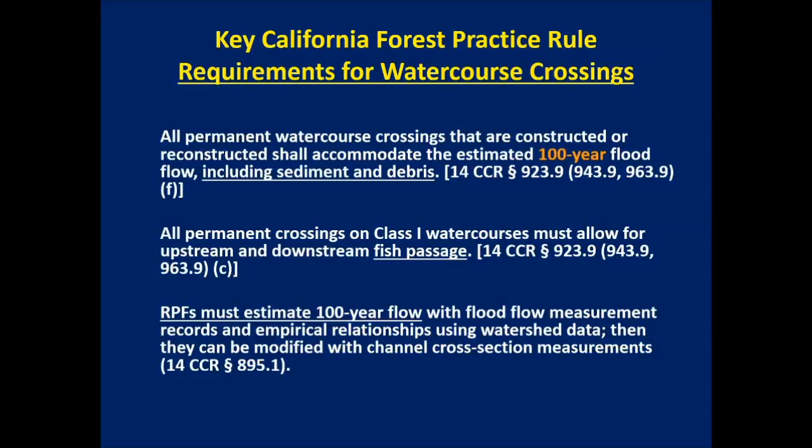Pleasure to be here and give a talk myself this afternoon. I want to report on some work that I did with Leslie Reid, my co-author, retired research geologist with the U.S. Forest Service PSW, who did a lot of work on this paper.

So basically, I would call this an applied hydrology talk. We're using Caspar Creek flow records to test peak flow prediction methods applicable to watercourse crossing design.

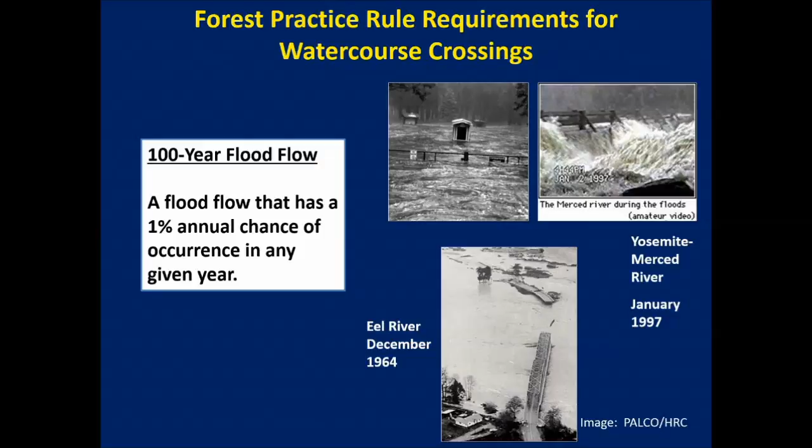Just a quick outline for what I'm going to talk about: introduction and background information, the Caspar Creek site (Liz has already discussed that, so I don't have to spend a lot of time on it), the methods we used including methods to predict peak flows, our results comparing the methods and sub-watersheds in Caspar Creek, implications for crossing design, and some summary points.

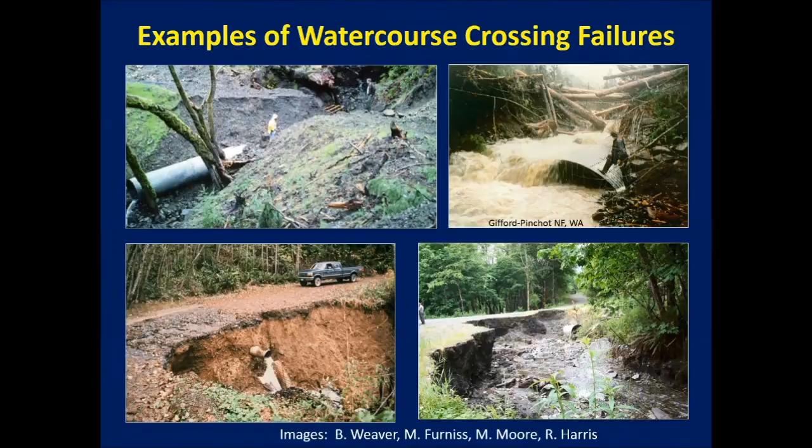With the California Forest Practice Rules, since July of 2000, foresters have had to design permanent crossings on non-federal timberlands for the 100-year flood flow, as well as passage of sediment and debris. When I started in 1981, it was a 25-year event, then in '83 a 50-year event, and in 2000 a 100-year event. So a 100-year event is quite a strict standard.

If it's a Class 1 fish-bearing stream, obviously they have to be designed for fish passage. And when registered professional foresters estimate 100-year flood flows, they have to use flood flow measurement records that might be available, and empirical relationships using watershed data, then modify that with direct channel cross-sectional measurements.

Just so we're on the same page, a 100-year flood flow is a flood flow that has a 1% annual chance of occurrence in any given year.

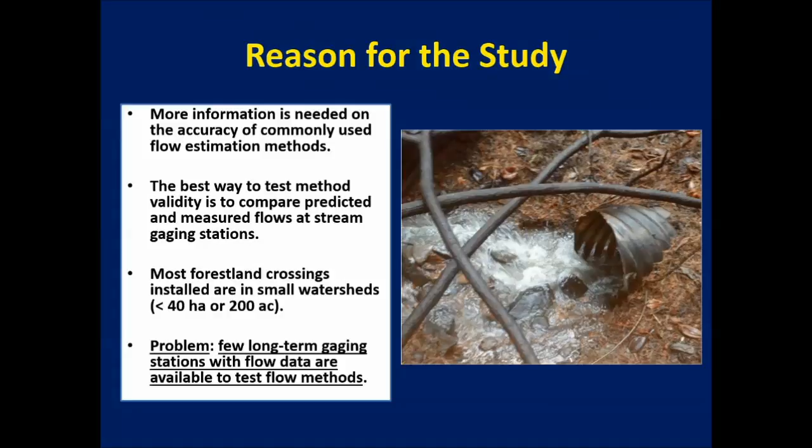We've heard today about some flows in the North Coast Redwood region over the last several years. We really haven't had a 100-year flood flow for a very long time. We did have one in the Central Sierra in January '97, the New Year's Day storm. But we haven't had an 80 to 100-year event in the North Coast for most of the region since December '64, the legendary '64 flood, and here we show the Eel River.

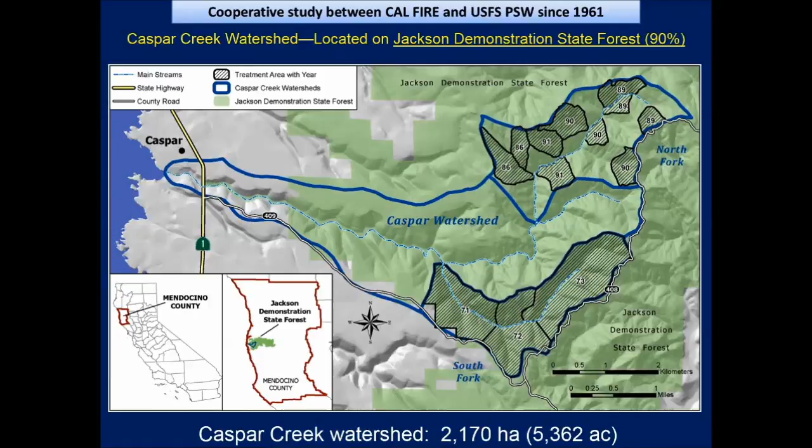We do, unfortunately, have a lot of examples of failed watercourse crossings from lesser storms. Three of these are from the coast region, the Redwood region. Also included on the top right, a photo that Mike Furniss and Sam Flanagan have shown a lot that I always liked - it's from Gifford-Pinchot National Forest in Washington.

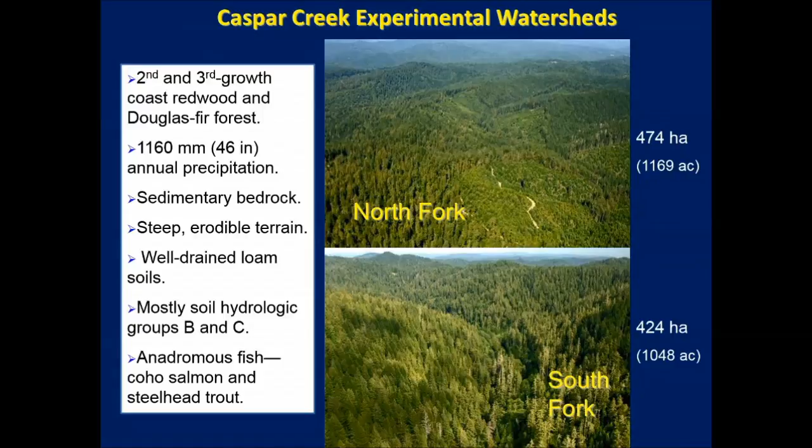So the reasons for this study: we think more information is needed on the accuracy of commonly used methods that foresters use for designing watercourse crossings. The best way to test the validity of these approaches is to compare them to measured stream flow data.

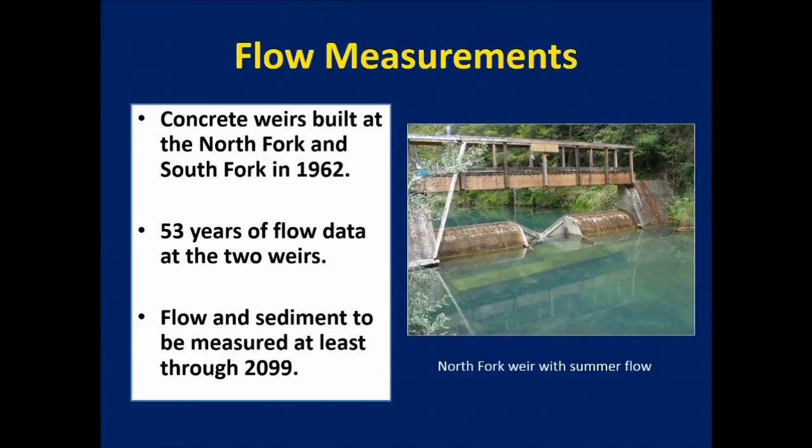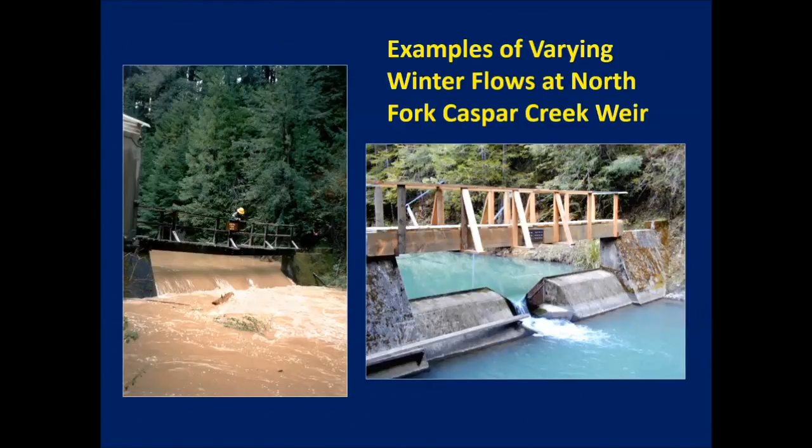Most forest crossings, and we've been monitoring forest crossings for more than 20 years, a heck of a lot of them are in small headwater streams - many in Class 2, Class 3 streams that are intermittent or ephemeral and often have drainage areas less than 200 acres. So the problem is we don't have that many long-term gauging station records to test these methods.

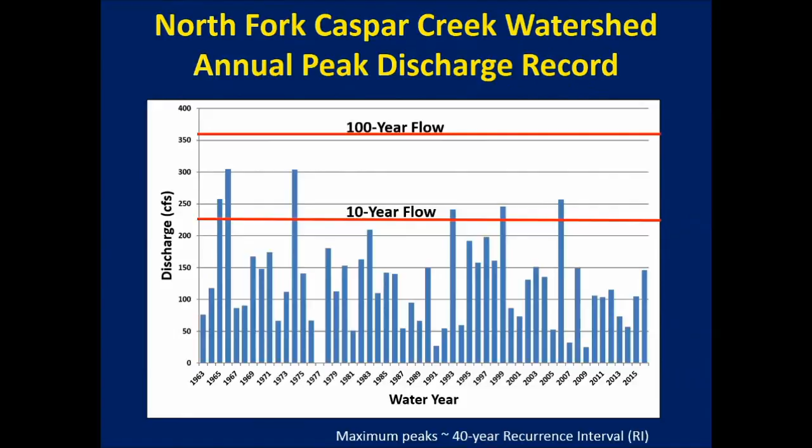We don't have a lot of gauging station data in these very small watersheds, but luckily we do have a long-term data set from Caspar Creek. Liz has told you about Caspar Creek, and I know a lot of you know a lot about it already. It is the site of a long-term watershed study between CAL FIRE and the PSW since 1961.

The experimental watersheds are located on Jackson Demonstration State Forest, site of 2 experiments, the South Fork in the '70s and the North Fork in the late '80s, early '90s, and a 3rd experiment currently planned.

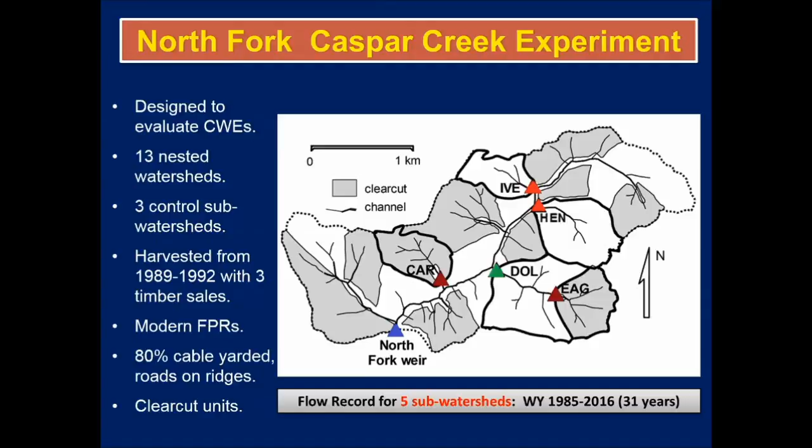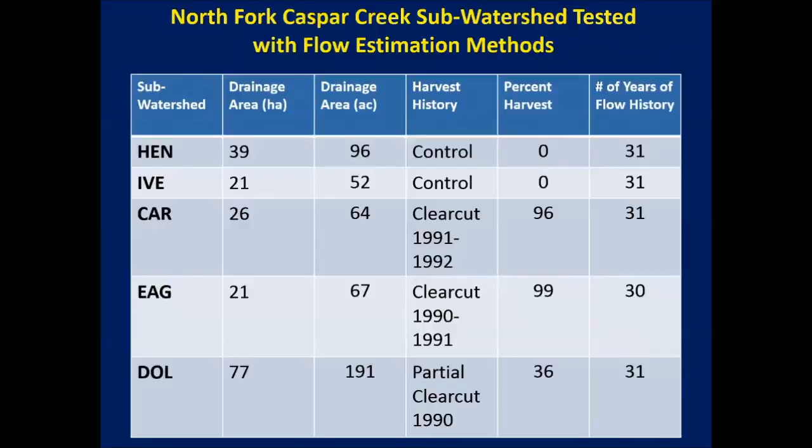It is second growth and third growth coast redwood and Douglas fir forest, as we talked about, 46 inches of annual precip, steep erodible terrain subject to landslides, as Liz told you about a few minutes ago. Well-drained loam soils, mostly in soil hydrologic groups B and C, and anadromous fish streams.

The weirs at the North and South Forks were built in '62, so we have a long 53-year record of flows, peak flows in both the North Fork and the South Fork, and we expect to continue to monitor with a long-term agreement with the PSW through at least 2099.

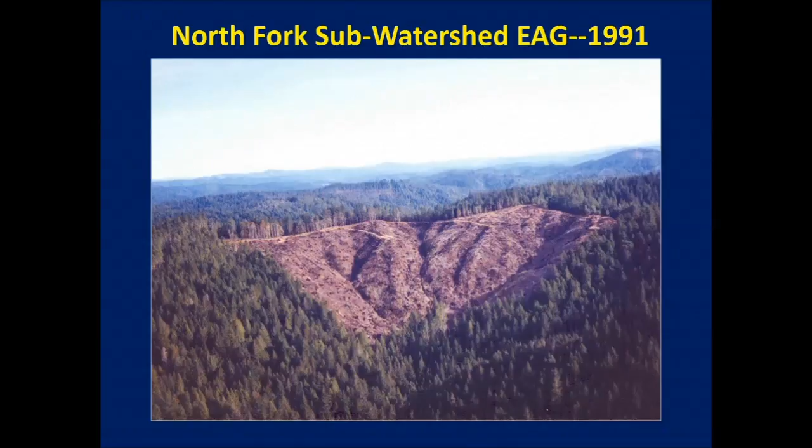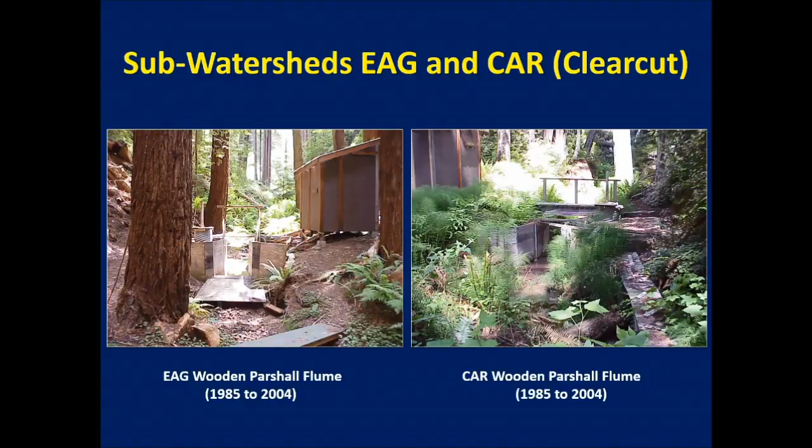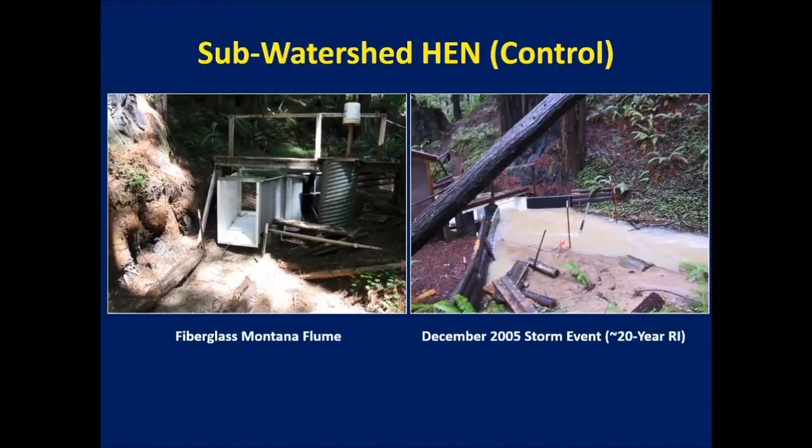For our study, we focused on the North Fork, where we installed headwater monitoring stations in the summer of 1984. I enjoyed helping build those stations that summer, and we put headwater stations in 8 tributaries, and 5 of those have continued to be monitored for the 31-year record.

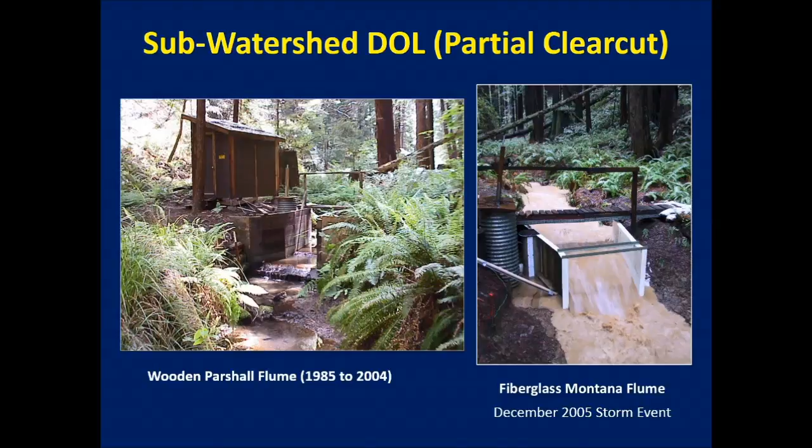The control watersheds shown here in red are IVE and HEN. The clear-cut subbasins are EAG and CAR, shown in brown, and our partially clear-cut watershed is DOL. These are all less than 200 acres in size. 4 of the 5 are less than 100 acres in size.

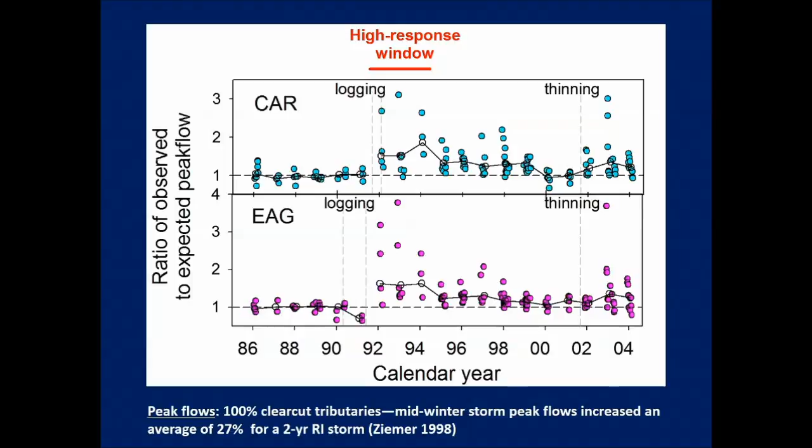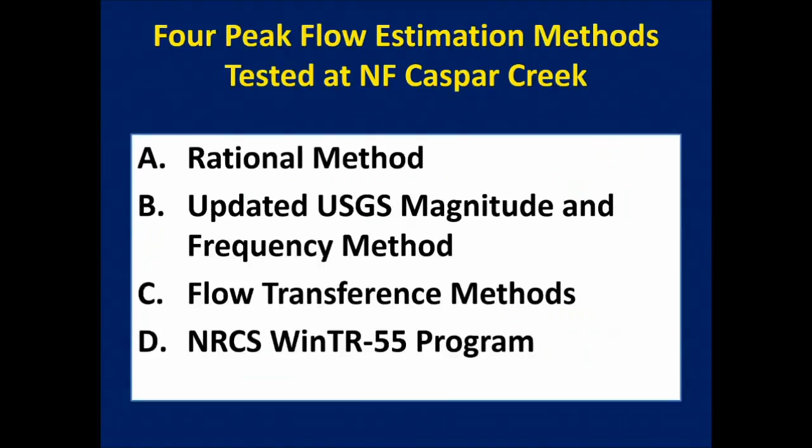It was not a fuzzy clear-cut, one with nature nooks or anything like that. This was a knockdown, real clear-cut like we did in the old days.

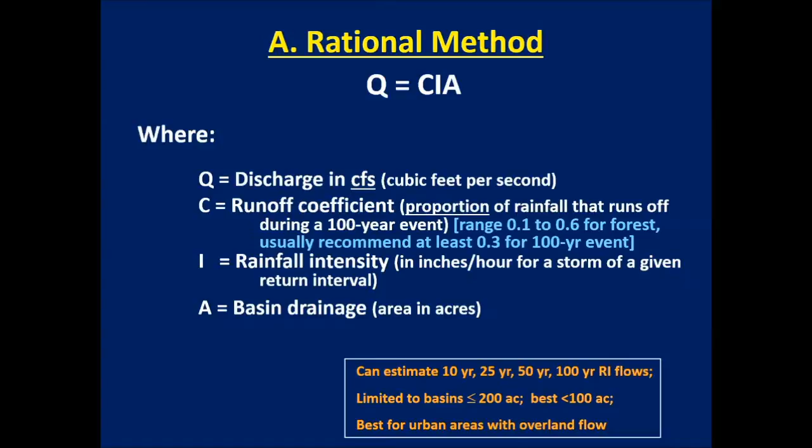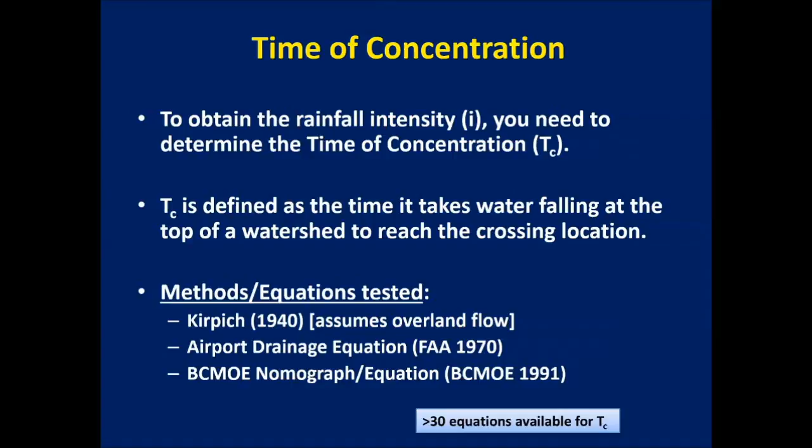Bob Ziemer looked at changes in peak flows for these clear-cut headwater tributary watersheds, CAR and Eag. He found almost a 30% increase in peak flows for the 2-year recurrence interval flood event, then some nice recovery over time, recovering in about 10 or 11 years. But we did some pre-commercial thinning, reducing the canopy, which elevated peak flows again at that point.

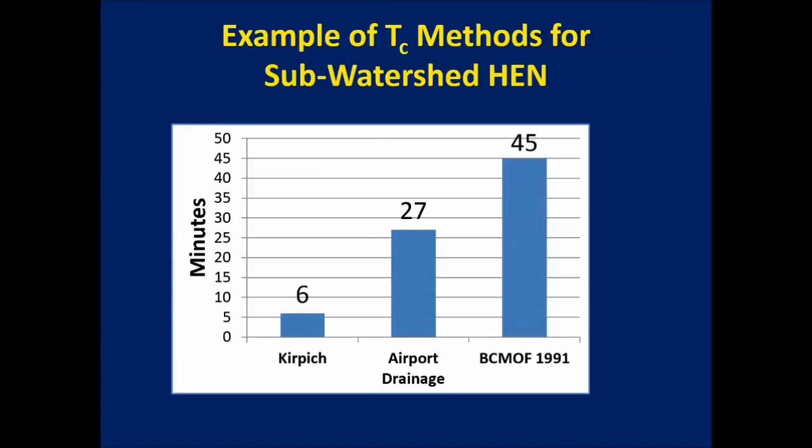The 4 methods that we tested for predicting peak flows were the rational method, the USGS magnitude and frequency method, flow transference methods, and the NRCS TR55 program.

The rational method has been around for more than 150 years, used a lot still in urban settings, and foresters are still using it a fair amount as well. It is limited to small watersheds, less than 200 acres, and performs best under 100 acres.

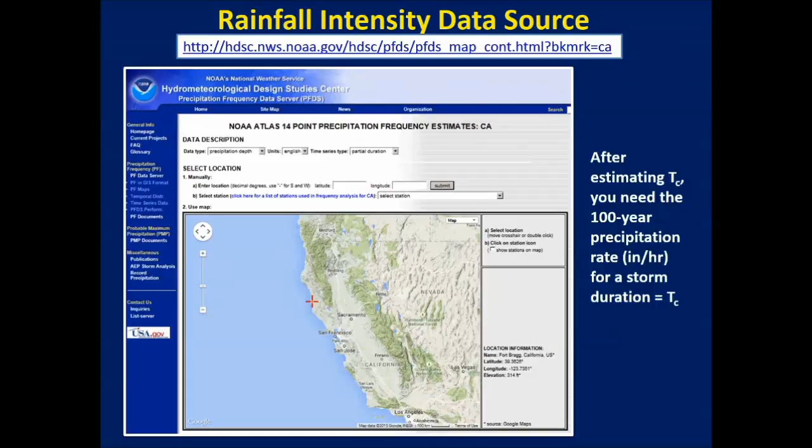It is Q equals CIA. C is the runoff coefficient; typically we suggest something like 0.3 for forested watersheds. It can be as low as 0.2 for a 10-year event, and the literature even suggests as low as 0.1. I is the rainfall intensity in inches per hour for a storm of a given return interval, and A is the drainage basin area.

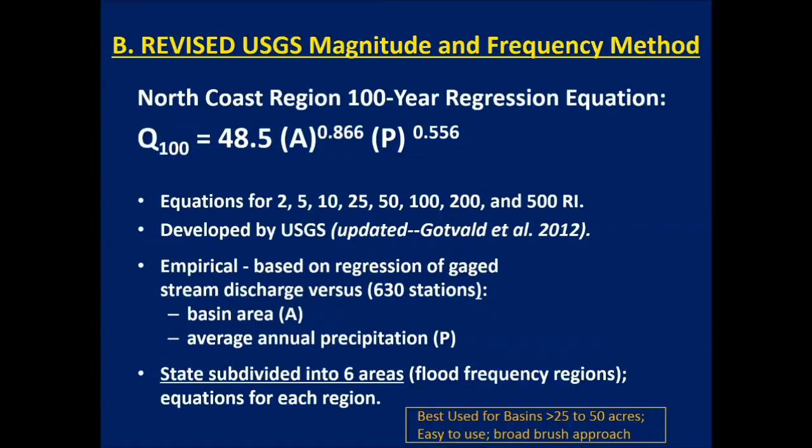You do need to obtain the time of concentration to get at the rainfall intensity, and the time of concentration is simply how long it takes water to go from the top of the ridge down to the crossing site. There are more than 30 equations in the literature to predict time of concentration.

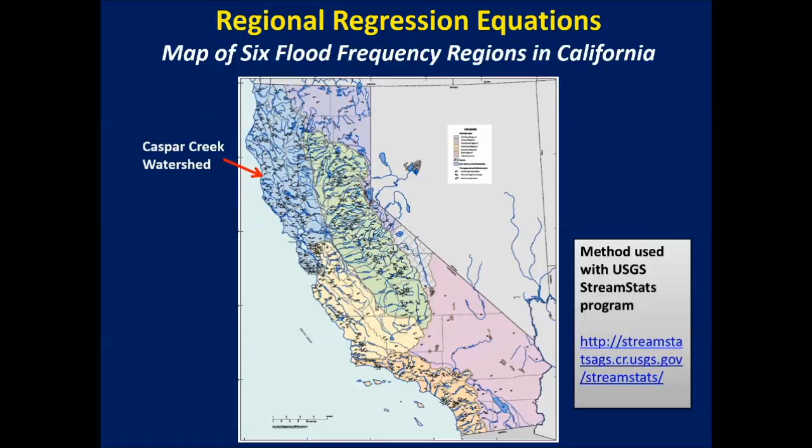We tried the age-old Kirpich method that's been around since 1940, the airport drainage method from the FAA in 1970, and a British Columbia Ministry of the Environment nomograph developed in 1991. These yield widely varying times of concentration.

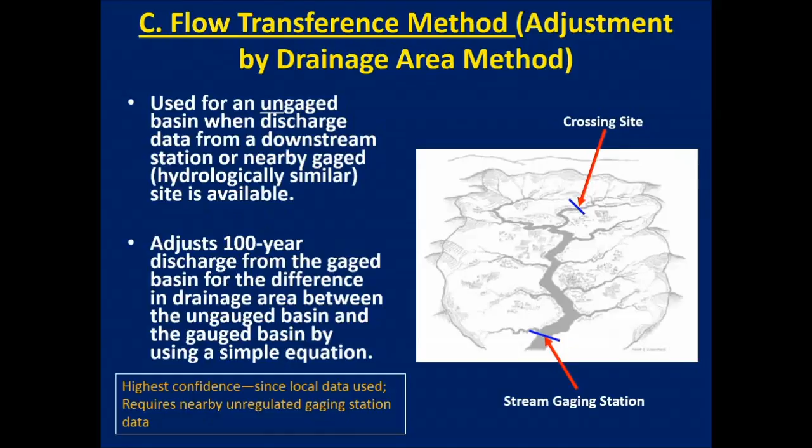The Kirpich method is basically for overland flow, so it comes up with a really short time of concentration for Sub-Watershed HEN at 6 minutes. We think a more realistic estimate is the British Columbia Ministry of the Environment nomograph, coming in at about 45 minutes, based on estimated movement of water on these hill slopes and stream channels.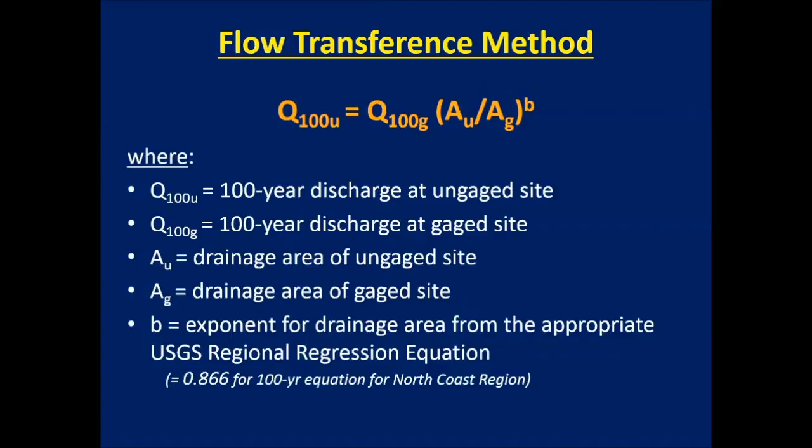Once you have the time of concentration, you can get the 100-year precipitation for that time of concentration. We suggest using the NOAA Atlas 14 for rainfall depth duration and frequency data, which is available online and very easy to use.

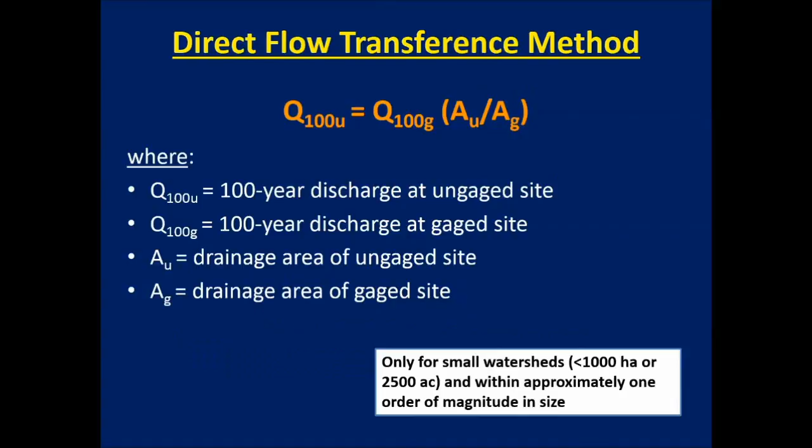The second method that we tested is the USGS magnitude and frequency method. Gotvald et al. updated these in 2012, replacing the old Waananen Crippen equations that were around since '77, so they now include updated data and more recent flood events.

There are equations for varying recurrence intervals and equations for 6 regions of the state, and they're very easy to use. All you need for the North Coast equation is the basin area and the average annual precipitation. Easy to use, broad brush, because the areas in the state are large.

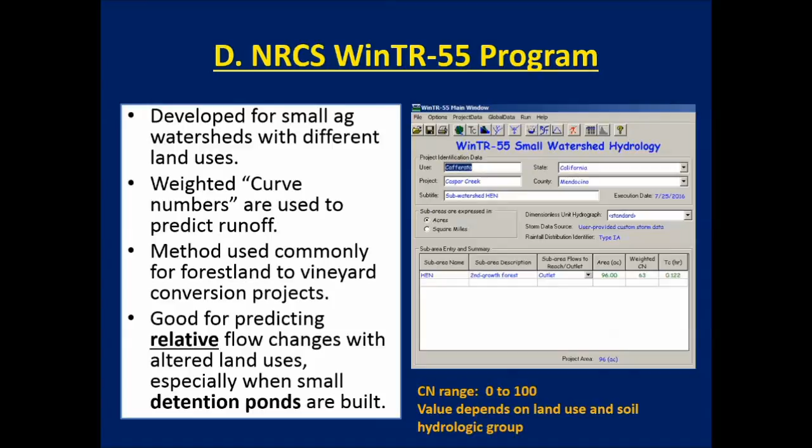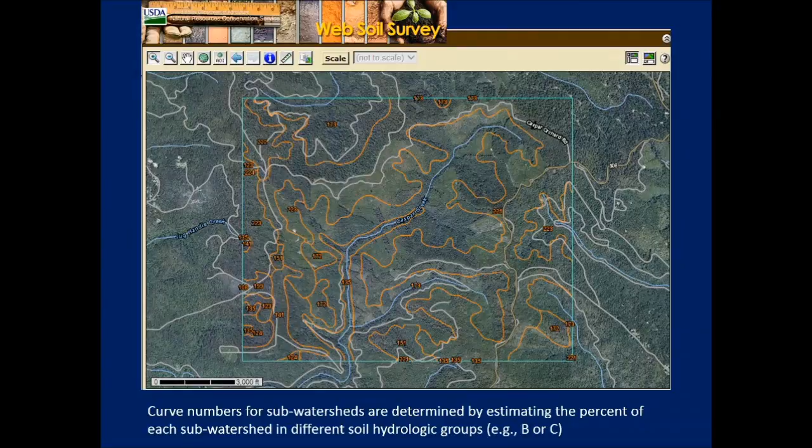The third method is the flow transference method, basically an adjustment of drainage area method. It's used where we have a crossing site, and then downstream from that crossing site we have a lengthy gauging station record, or perhaps nearby in a hydrologically similar basin, a fairly lengthy gauging station record. You adjust the 100-year discharge for the gauge station for the difference in drainage area between the ungauged and the gauged using a simple equation. This does generate the highest confidence in the results because it's using local data.

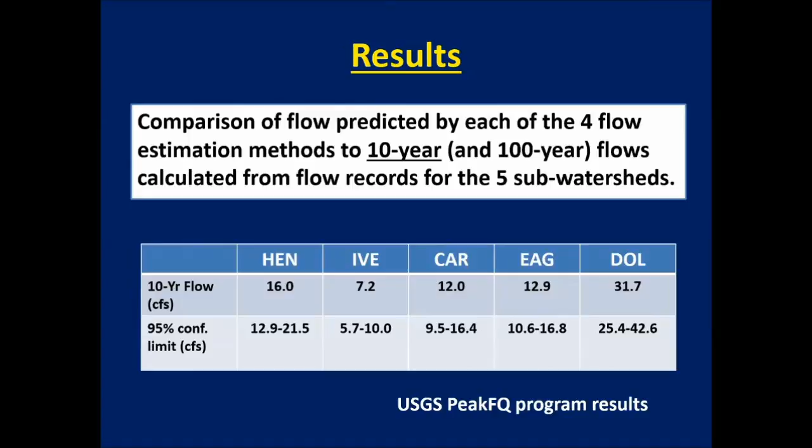So here's the equation. It's fairly easy to use. The area ungauged divided by the area gauged, just prorating that, and then raising it to an exponent for drainage area. That is because small watersheds are more flashy than large watersheds. If you do have a really small watershed, say less than 2,500 acres or 1,000 hectares, you can drop the exponent for drainage area and just go direct with the ratio of area ungauged to area gauged.

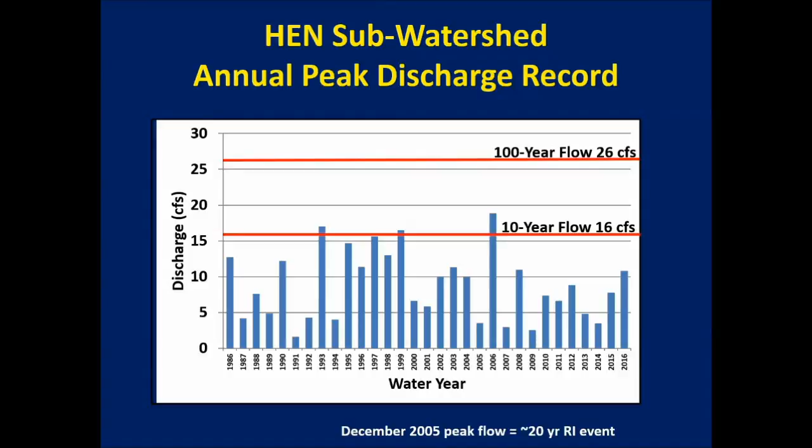We did these, just an example here of watershed HEN, dividing the area of HEN, 96 acres, by the area for the North Fork Weir, 1169, and then multiplying the 100-year flood flow.

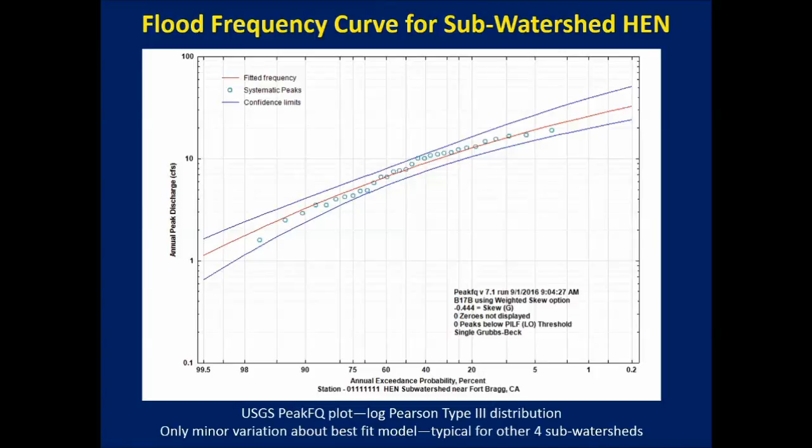The last method we tried was the NRCS TR55 program. This is based on SCS curve number methodology that's been around since the 1960s, maybe the 1950s. Curve numbers range from 0 to 100, and the value depends on the land use and the soil hydrologic group that is in the sub-watershed.

It's used commonly in the coast region for vineyard conversion projects, so if you have detention ponds or small reservoirs, it's a good method to use for that. And it does do a pretty good job of getting a relative change in peak flows.

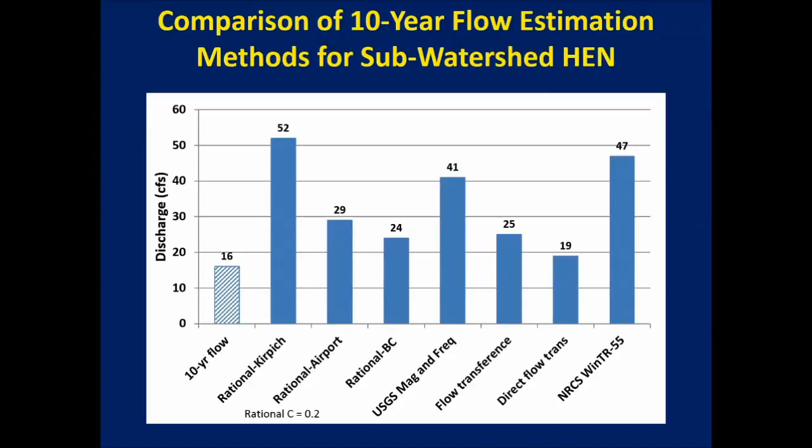So if you want to know what soil hydrologic group you're looking at, you can go to the NRCS Web Soil Survey online, look at the soil series, and make an estimate of the percent each subbasin has for each soil hydrologic group, and I did that for the 5 sub-watersheds.

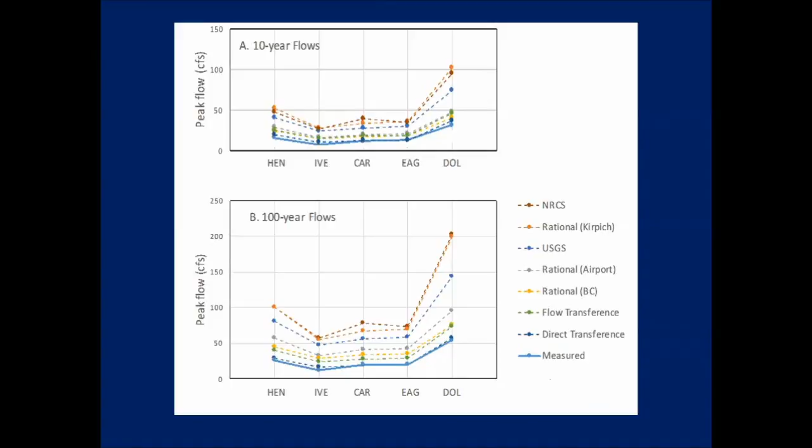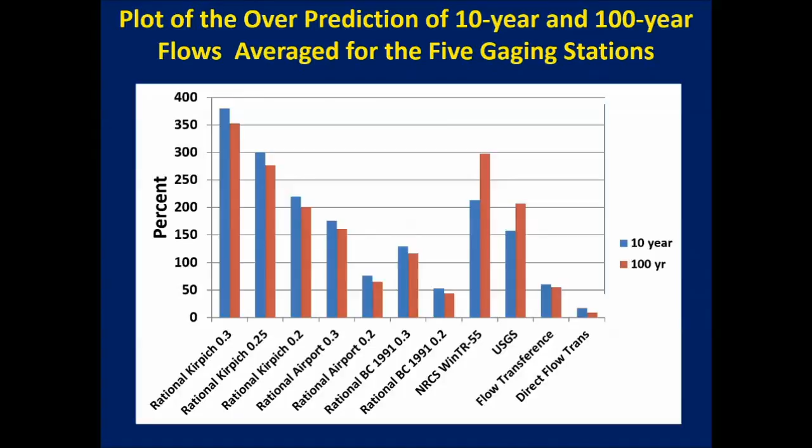If you look at the comparison of 10-year estimated flows from the methods I talked about compared to the flood frequency analysis estimate of 16 CFS, the commonly used methods by the foresters come in a bit higher, some of them quite a bit higher.

The direct flow transference did the best at 19 CFS, and the rational method with the BC, British Columbia nomograph, and the rational with the airport drainage did reasonably well.

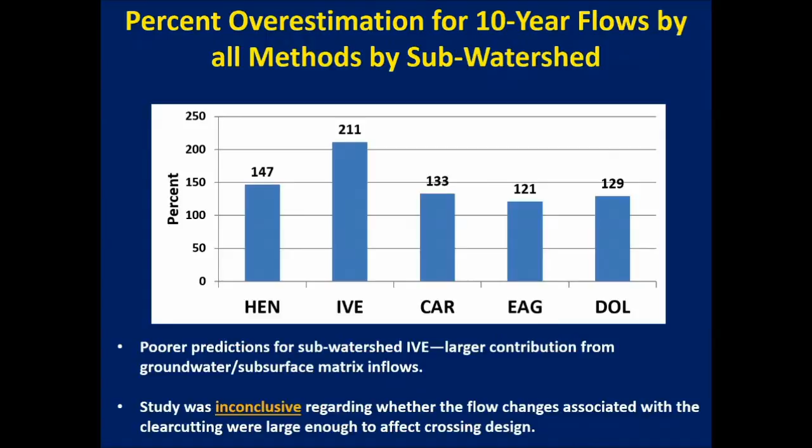We have in the paper these plots of 10-year values for peak flows and 100-year values for peak flows for each of the 5 watersheds for each of the methods. You can see that the poorest ones were the NRCS TR55 and the rational Kirpich method. The best, again, were direct flow transference and standard flow transference.

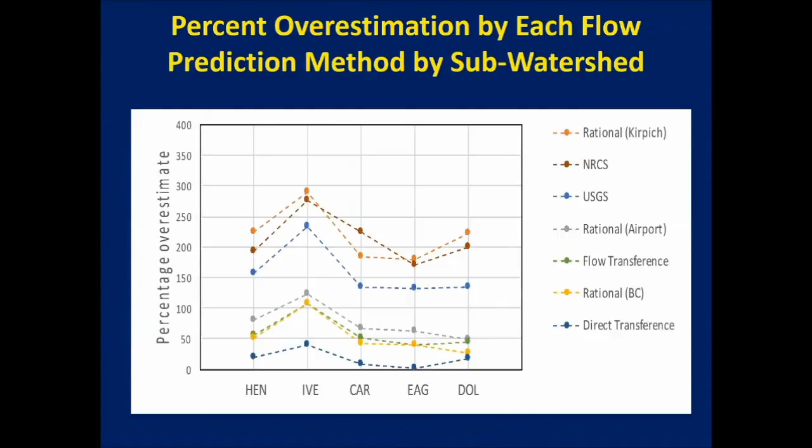If you look at the percent over prediction for 10-year flows, average for the 5 gauging stations, it was 380% over prediction for the Kirpich with the rational method, only a 17% over prediction for direct flow transference.

The other methods that did reasonably well were standard flow transference, and rational with the BC nomograph, and rational with the airport drainage method. In 1995, Carl Yee, then a professor at Humboldt State, recommended using the airport drainage method for time of concentration, and that's been recommended for a while.

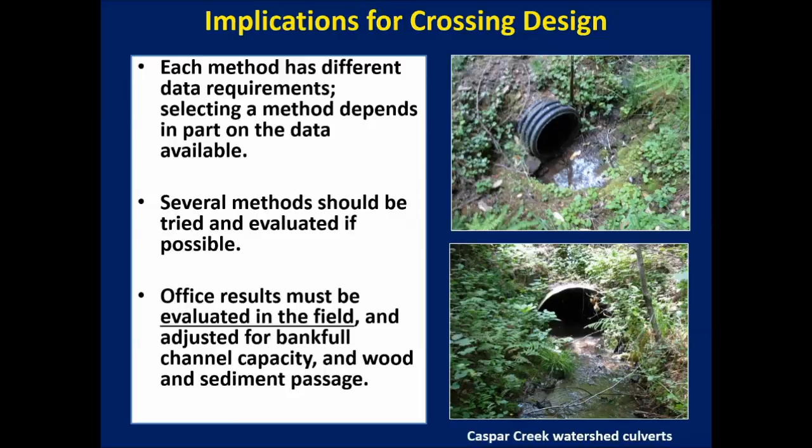We plotted the 10-year and 100-year flow estimates for the five gauging stations. The results are quite similar for the 100-year flows as would be expected for the 10-year flows - nothing significantly different, same general patterns.

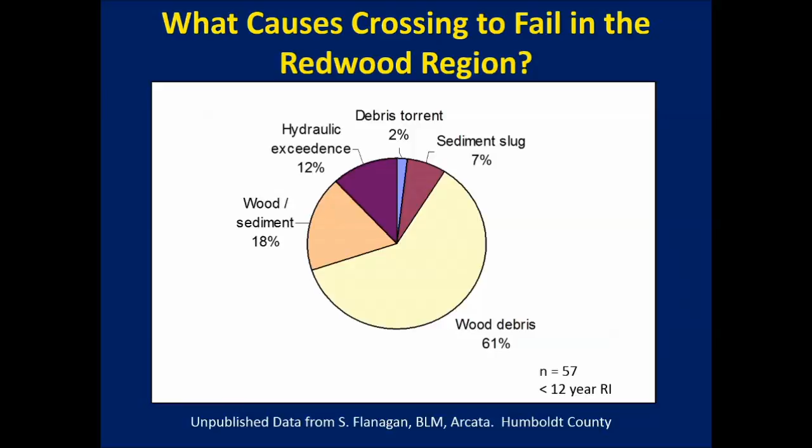When we looked at the predictions for the five sub-watersheds, we were curious if anything would shake out. Four of the five had similar over-predictions for all methods, but watershed IVE, the control watershed, was quite a bit higher and had the poorest predictions of any of the five sub-watersheds.

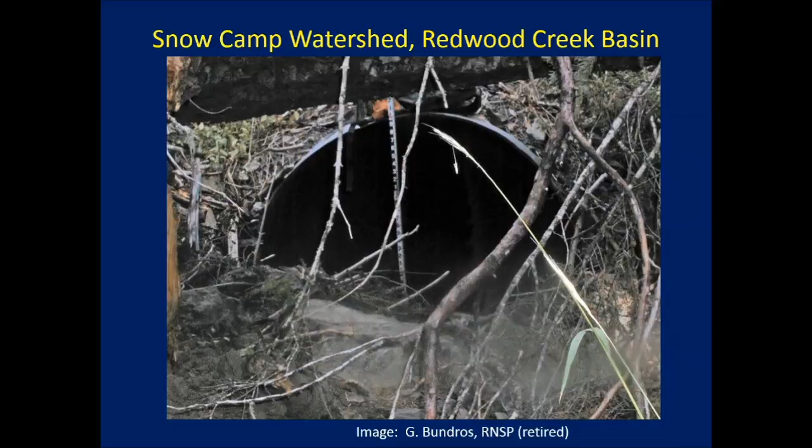We think that's probably due to larger contributions from groundwater or subsurface matrix flows, possibly due to old landslide deposits in Ive. The study was inconclusive on whether the changes associated with the clear-cutting in Carr and Eeg were large enough to affect crossing design. We didn't feel like we had enough data to make a strong statement on that.

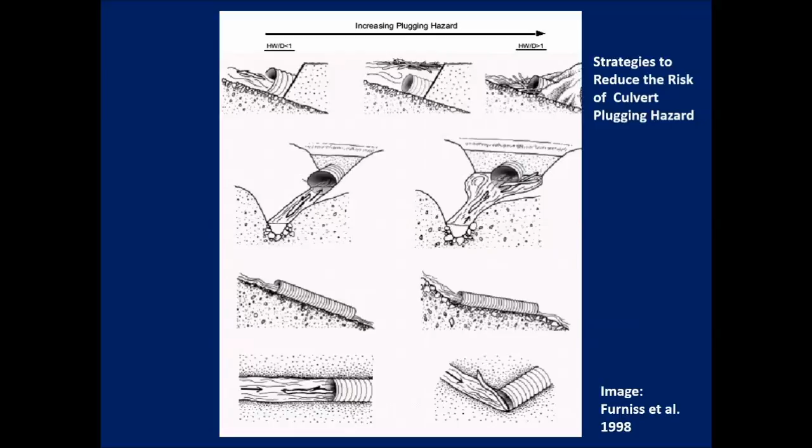The implications for crossing design: each method has different data requirements, and obviously some will work better than others depending on what data you have. You may not have a downstream gauging station or one nearby, so you may not be able to use flow transference methods. We suggest using several methods if possible and evaluating those for uncertainty, model uncertainty. And the office results always have to be field checked with channel cross-sectional measurements.

In the coast region, you can try the three-times-bankfull-stage method, and it should give you a reasonable determination of whether your office method is actually accurate. You also have to design for wood and sediment passage.

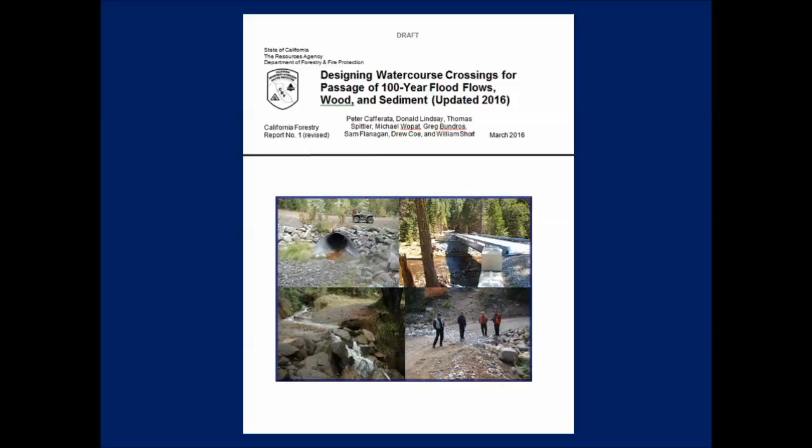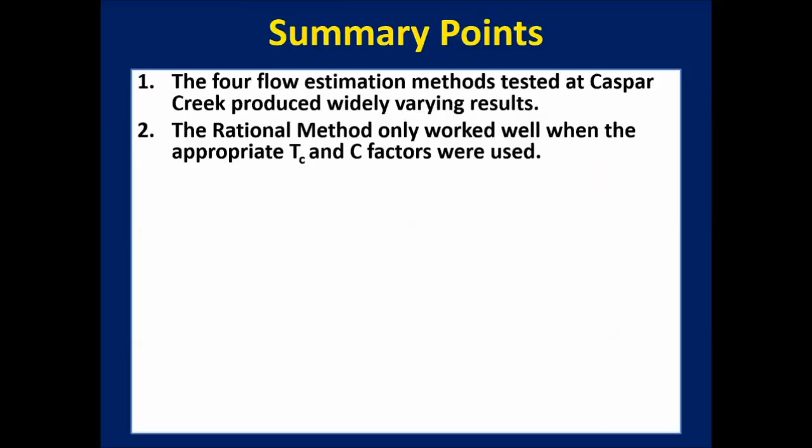Sam Flanagan works for BLM out of Arcata. He collected this data in 2004 for storms less than a 12-year recurrence interval: 57 failed crossings, almost 80% failed due to woody debris or wood and sediment. So hydraulic exceedance alone rarely causes crossings to fail in the Coast Redwood region.

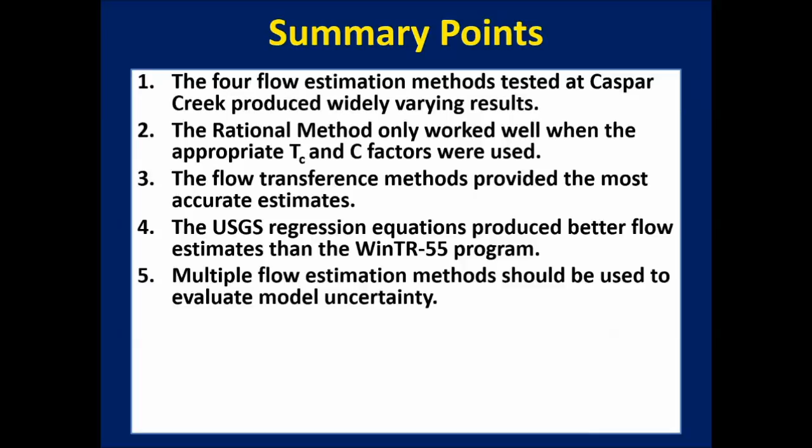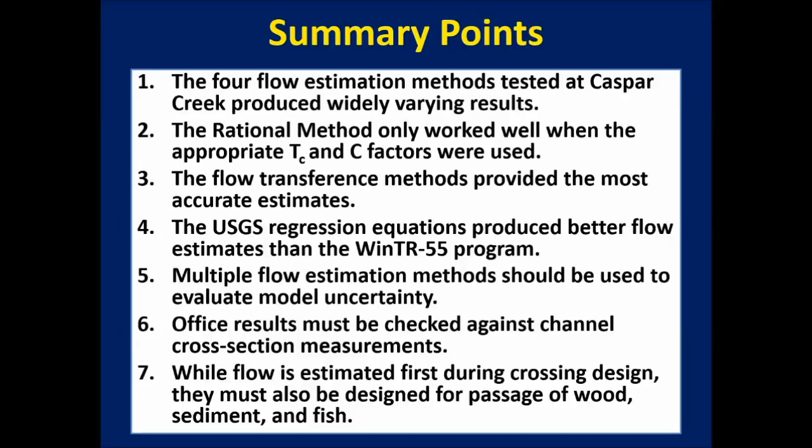You need to design for water, wood, and sediment. Greg Bundros, retired from Redwood National and State Parks, had this photo in the Redwood Creek Basin illustrating wood blocking the entrance. Mike Furniss and others a few years ago illustrated ways to reduce the risk of crossing failure.

These include having the headwater depth to pipe diameter ratio less than 1, having the pipe roughly the same width as the active channel, having the pipe at the same gradient as the stream channel so we don't get bed load dropping out at the inlet, and having the pipe appropriately aligned.

In the last 15 years in the Coast Redwood region, we've moved away from culverts to some degree - still probably putting in 70% culverts, but we have a lot more bridges, open bottom arches, and rock armored crossings. These are much more forgiving for passing wood and sediment, better for fish passage, and they are not as sensitive to errors in predicting 100-year flood flows.

These concepts are covered well in PWA's revised Handbook of Forest and Ranch Roads. We are covering them in our revised document put out in 2004, and we have a new version we're going to release by the end of this year. We're designing for 100-year flood flows for wood and sediment, and it will cover bridges and rock armored crossings. Don Lindsay has written those chapters from CGS.

So in summary, we tested four estimation methods at Caspar Creek. They produced widely varying results for peak flows. The rational method can work well with the appropriate time of concentration and runoff factors. Flow transference methods provide the most accurate estimates. USGS equations produce better estimates than the WinTR-55 program.

We suggest using multiple methods if possible. We do need to check the results against channel cross-sectional measurements, and we need to design for wood and sediment passage as well as fish.

A lot of people helped over the years on this guidance document and the one we're working on in this paper, and I want to acknowledge all of those folks. Thank you.